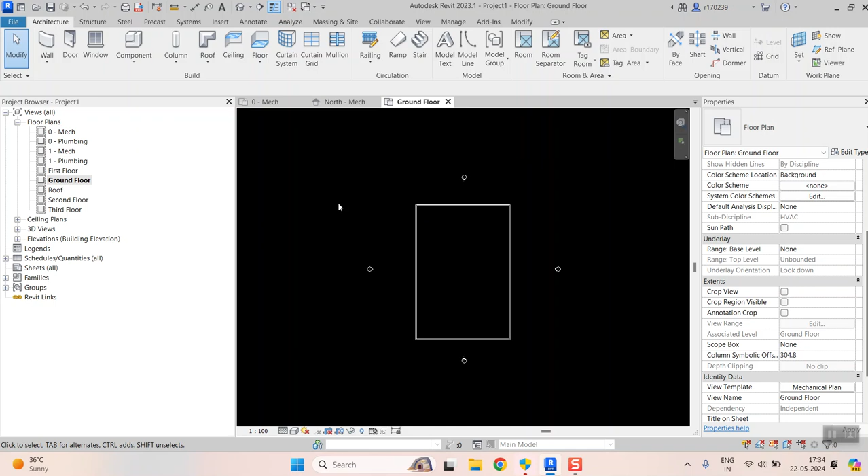For that we need to use two shared parameters. I will explain how to create the shared parameters also. To create the shared parameters, you have to go to the Manage tab, and in the Settings panel you will find the Shared Parameters option. You have to click on the Shared Parameters option. Some pop-up will come, just ignore it.

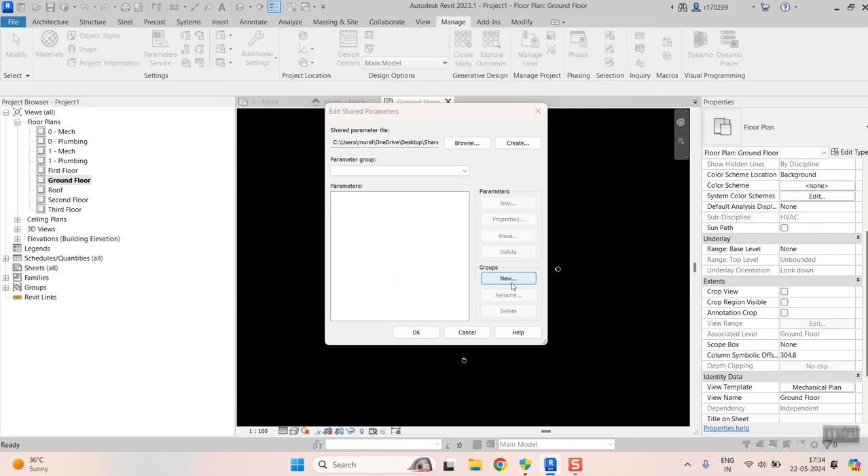Once the shared parameter pop-up is opened, you have to click on Create, and you have to assign one name. Currently I am using the same name, shared parameter. If there is no name, you have to add some name. Once you add that name, I will click on Save. Before creating the parameters, you have to create one group. So I am creating a group as browser organization.

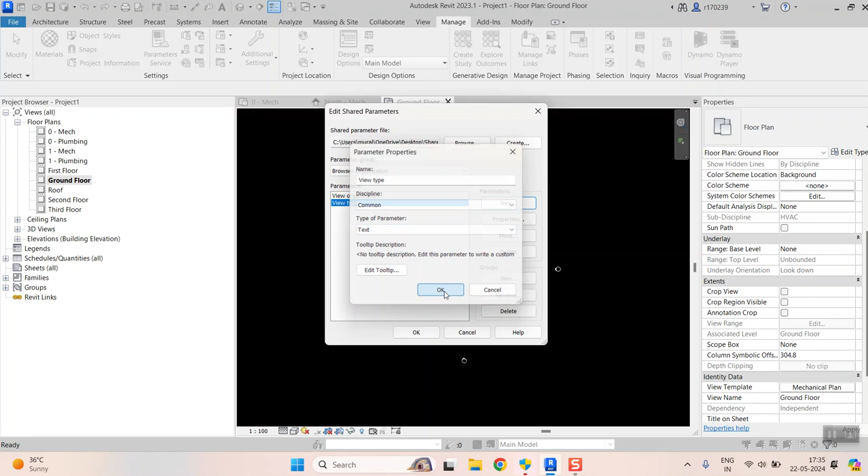Once the group is created, now we have to create the parameters, that is View Organization, and I'm keeping it as a text type of parameter, and one more I'm taking as View Type. Here you can assign any names. Just for identifying purposes I am keeping it in a standard way, View Organization and View Type. So once shared parameters are created, we call these shared parameters as project parameters.

To call these shared parameters as project parameters, again we have to go to the Manage tab and Settings panel. Above the Shared Parameters option, there is one more option called Project Parameters. We have to click on Project Parameters, and if you click on New Parameter, a form pop-up will open. This is for creating a new project parameter, but we already created the shared parameter. So we have to click on the Shared Parameter option, and select the created parameters one by one.

First I will click on View Organization, and it should be instance, and it should be text, and we have to assign one category, I'm taking it as Views. For any category you can assign these parameters. Once you click on OK, it will highlight here. Previously there were no parameters. Now we are calling shared parameters into project parameters.

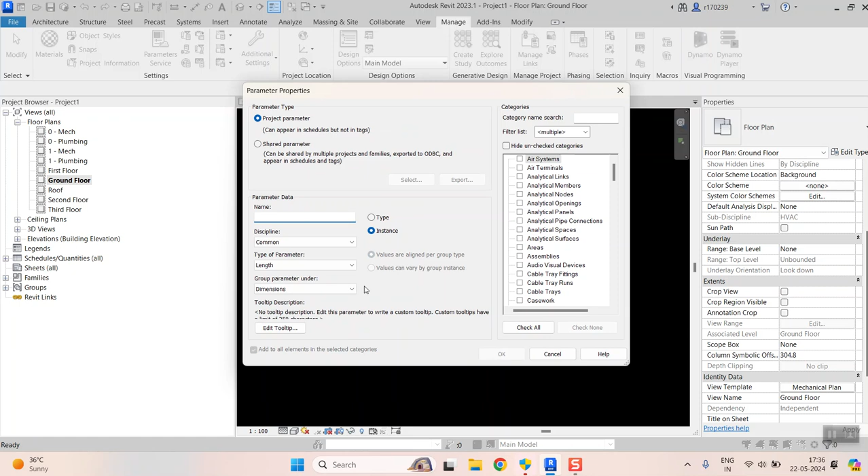One more we have to take, that is View Type, and it is also for the views. Once you click OK, all the parameters come here, and you have to click on OK. Now you can see here my project browser is a little clumsy.

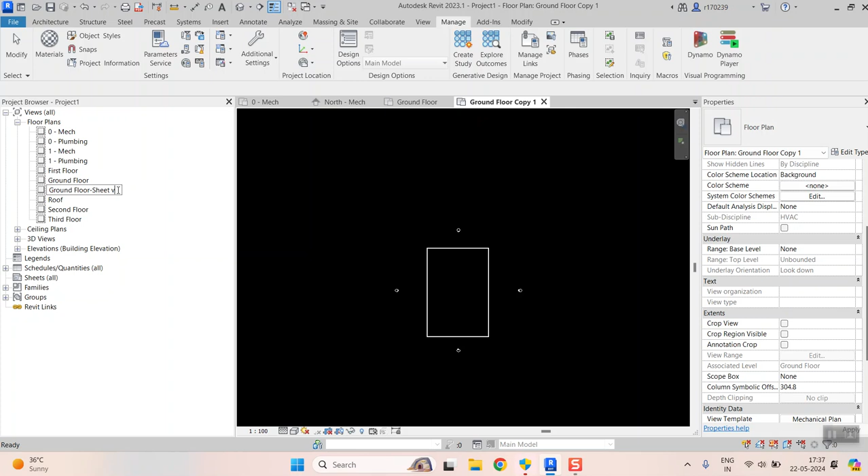Just give me a minute, I will rename this as a sheet view. Wait, I will duplicate this one. Ground floor sheet view, and I'm taking one more. This is also a kind of sheet view. I'm just giving the name.

So now you can see there is no browser organization. That's why, if a new guy comes and is working in this floor plan, he may do some changes. Ultimately it will affect your sheet view. For that we have to create the browser organization.

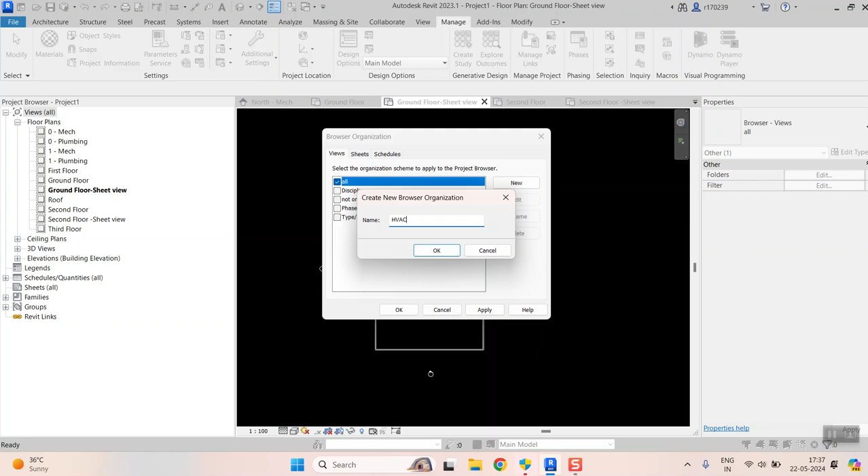Okay, now what I'll do, I'll right click on browser organization, views type, and I'll select the browser organization and I'll create one new name. Consider this is an HVAC file, so I am giving the name as HVAC. I'll click on OK.

Here in the filtering there is nothing to do with our parameters that we created previously. If you go to grouping and sorting, here we have to add whatever parameters we created previously: view organization and view type, and we have to give OK. And we have to select this, and once you select, all the floor plans, elevations, everything got mixed up.

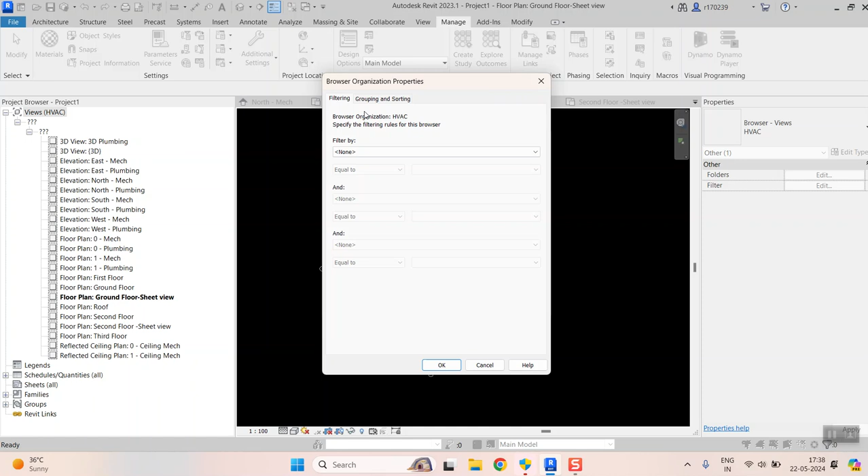Now you can see here two question marks came. That means you are using two parameters, so that's why two question marks came. If you assign only one parameter there, only one question mark will come. So if I go to edit, I'll remove one parameter here, view type, I'll keep it as none. So can you see one question mark gone?

The importance of using two parameters I will tell you here, so we can better organize our browser. So view type, once you give this, it will come like this. Now I want to segregate all these floor plans. For that I will select the floor plans ground, first and second, and if you come here to properties, that option is not highlighted, that means a view template is applied, so that's why this option is not highlighted.

So we have to remove the view template, and once you remove it this option will highlight. So I will assign the name 01, it is the floor plans name I am giving. Inside that I am giving main views. So can you see here, it is better segregated now. That means in the floor plans I will have ground floor, first floor and second floor, under main views.

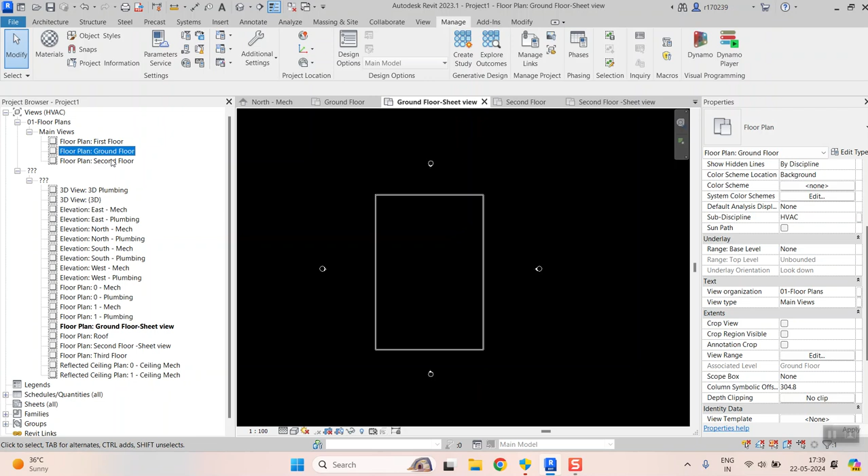Now I have sheet views also, so that should also come under the main views. For that I'll select the ground and second, and consider this roof also as one sheet view. Same way we have to remove the view template and give the same. It should come under the floor plans only, so I'll select floor plans, and here this is the sheet views. Can you see my browser organization is changed?

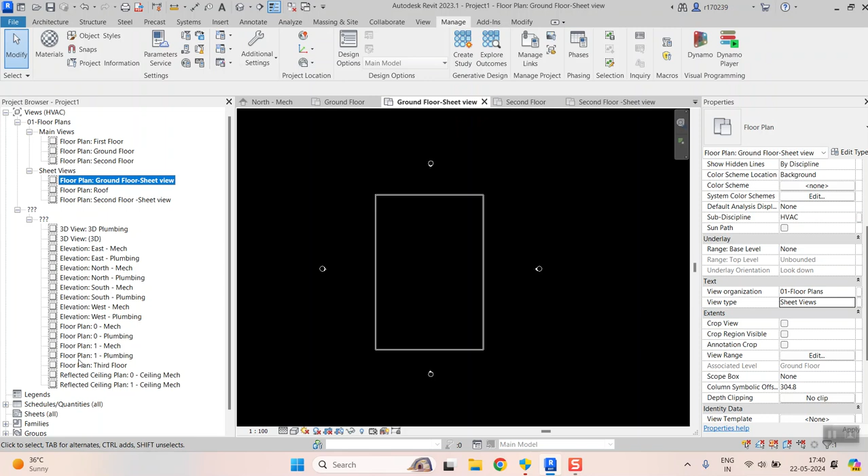Now there is a predefined organization, so that any new person who comes will think, okay, this is a sheet view, we should not touch. So we'll give one more name as working view also, so that new people will easily understand this is the working view. For that I'm selecting one more plan. I'm just duplicating this one. I'll select these two floor plans, remove the view template, and it should come in the floor plans only. This I'll use as working. Now you can see it will create like this.

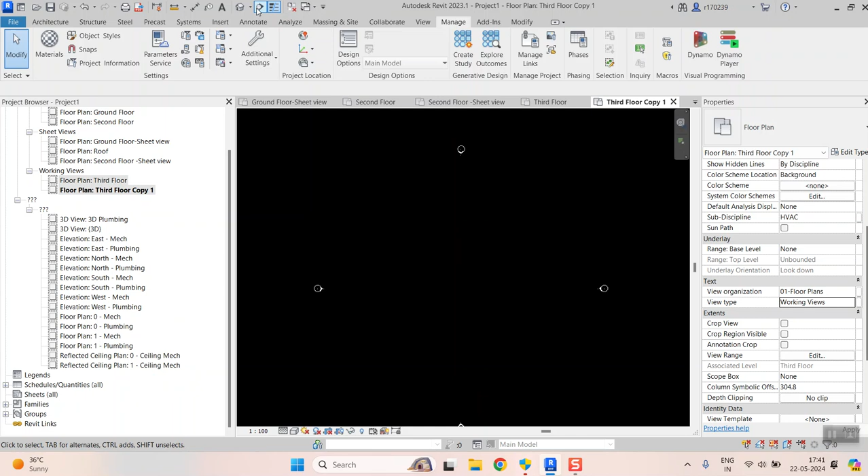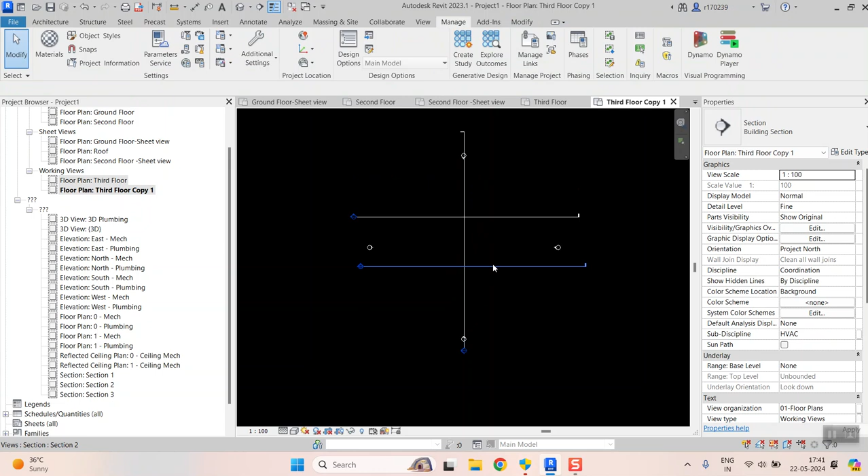Now let's say we have some more, I will take some sections here. Just for our understanding I am cutting 2-3 sections. So I have 3 sections. I use 2 sections in the sheet and one is not required. So here also I need to segregate the sections: one is a working section and the others are sheet view sections. Let's consider these two are the sheet view sections, section 1 and section 2. So same way we have to select section 1 and section 2.

In the browser properties, I'll create 02, and it will be sections, and here sheet views. We'll see if we give the same name whether it will come or not. So it came. That means we are segregating here.

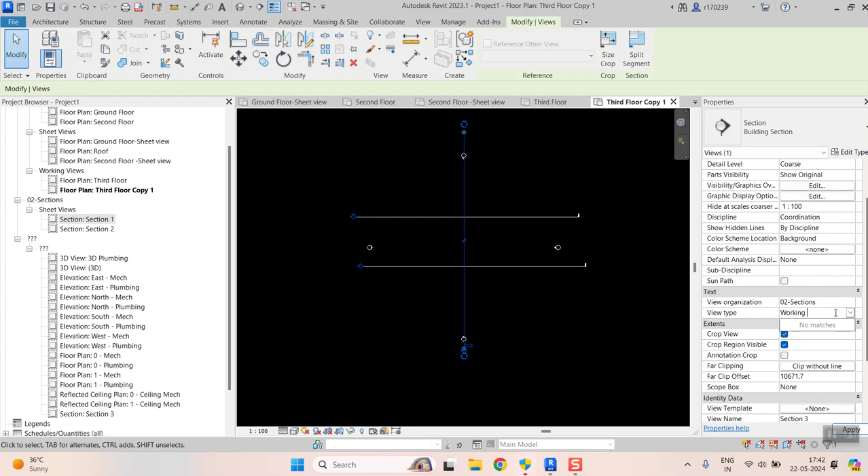These two sections belong to sheet views, and one more section is left here; that I'll keep in the section views, and this is the working section, working views. So like this we can arrange our browser organization with the help of shared parameters. So this is how it will work.